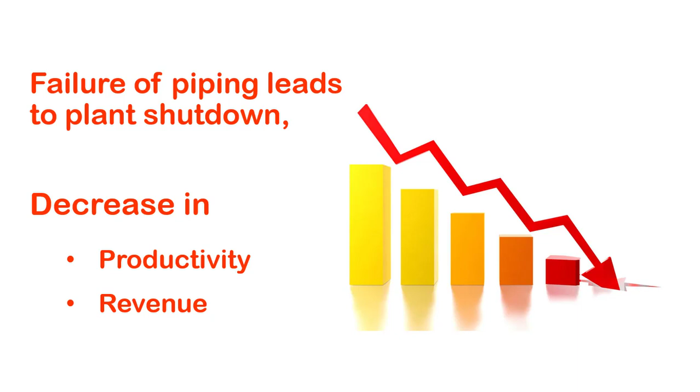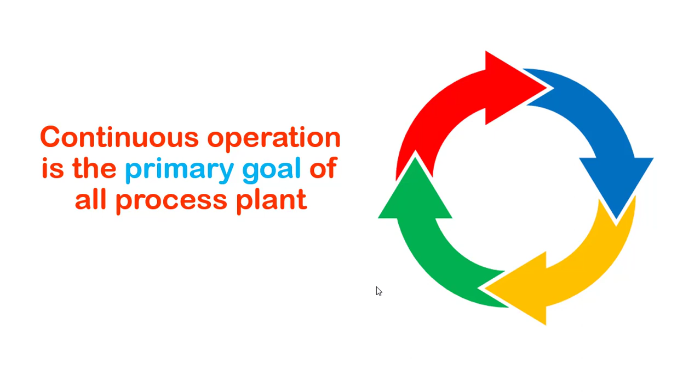Since piping is connected with every equipment in the process industries, a failure in piping could lead to plant shutdown. Plant shutdown decreases the productivity and the revenue of the plant, because continuous operation is the primary goal of all process plants. In case of failure in piping, it will disturb the continuous cyclical process. In turn, it will impact the productivity and the revenue of the plant. So this shall be achieved only by having a reliable piping network. A reliable piping network shall be constructed only by having good engineering principles. That is where piping engineering plays a vital role.

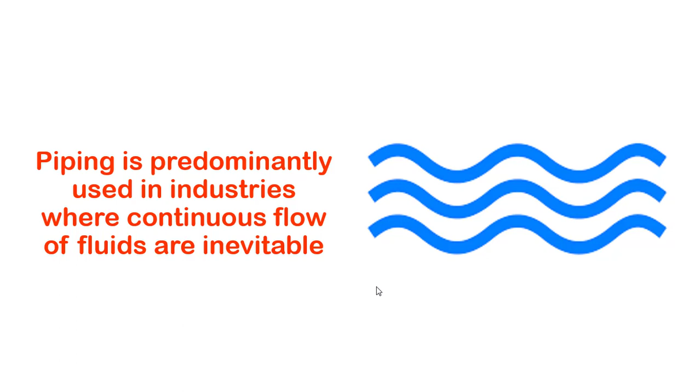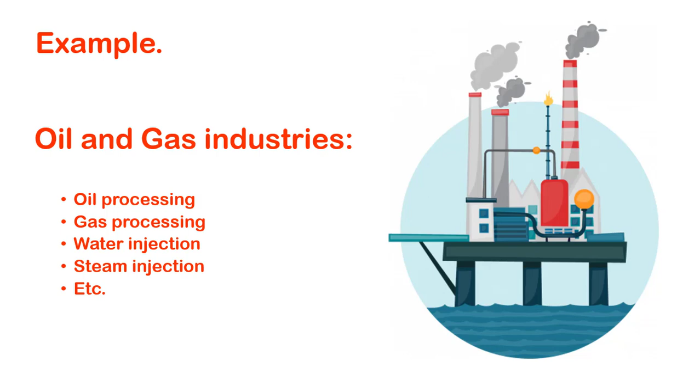We should also understand that piping is predominantly used in industries where the continuous flow of fluids is inevitable. For example, let's take oil and gas industries. In oil and gas industries, oil processing, gas processing, water injection, steam injection, and many other utility services work simultaneously. For this to happen, there must be a reliable piping network and reliable piping system. If there is no reliable piping system, it will not support the entire process and it will end up making huge damage to the infrastructure.

This is one of the reasons why I could see that opportunities are endless in piping, and the reasons are listed over here. The first reason is that all process plant operations are continuous, and for continuous operations, continuous monitoring is mandatory to prevent leaks and damages. Not only monitoring, it also requires continuous improvement to meet the industrial standard year on year. And it also requires modifications and expansions based on the utilization of the plant. So according to me, piping opportunities are going to grow to new heights, as I could see a growing demand for process plant requirements in our country.

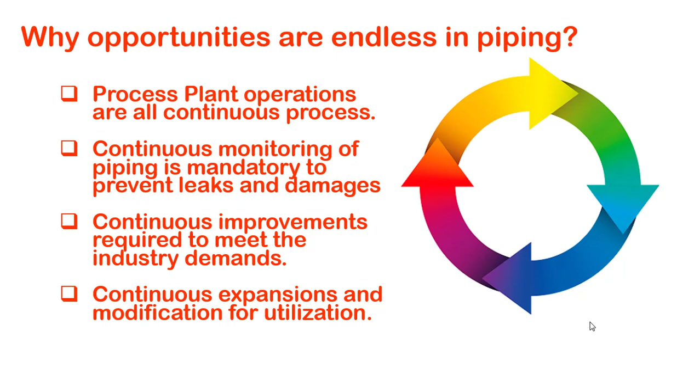Alright, let's get into the subject. I have classified the industries into two types, Class 1 and Class 2. Class 1 is a type of industry which needs more piping infrastructure, and Class 2 is a type of industry which needs less piping infrastructure. So basically, in Class 1 type of industries, you will be able to find more opportunities and more piping jobs. And in Class 2 type of industries, you will be able to find fewer jobs. Compared to Class 1, the magnitude of opportunities may be less in Class 2. So now let's see what are the Class 1 and Class 2 types of industries.

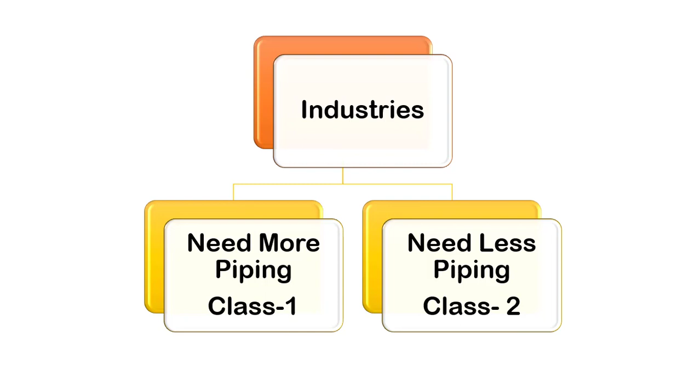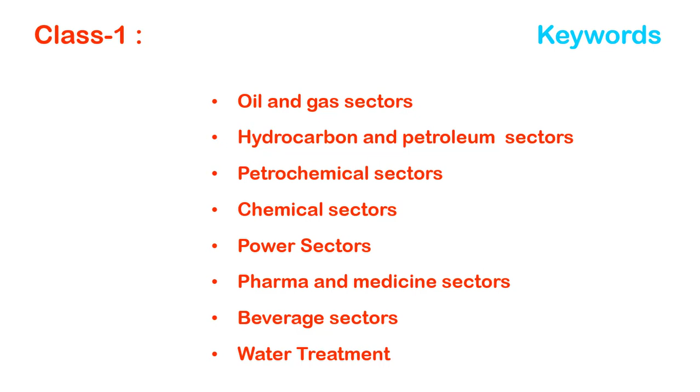In Class 1 type of industries: oil and gas sectors, hydrocarbon and petroleum sectors, petrochemical sectors, chemical sectors, power sectors, pharma and medicine sectors, beverage sectors, and water treatment plants and water treatment industries. These are the sectors and industries that fall under Class 1 type of industries, where you will be able to find a lot more piping opportunities and piping jobs.

Now let's see the Class 2 type of industries. Class 2 type of industries are basically the type of industry where the piping network requirements are less. Basically, the piping infrastructure requirements are less. But still you will be able to find an opportunity for piping, because as I said, the magnitude of the opportunity may be less, but still you will have openings in these industries.

So what are the industries that come in Class 2 type of industries? Basically FMCG sectors. FMCG companies with oil, shampoo, soap, hair beauty, hair conditioners and beauty products manufacturing units all come in Class 2 type of industries. And along with FMCG, fertilizers and cement industries, food processing units, and fire water service providers also come in Class 2 type of industries, because all these types of industries need a little amount of piping to handle utility services.

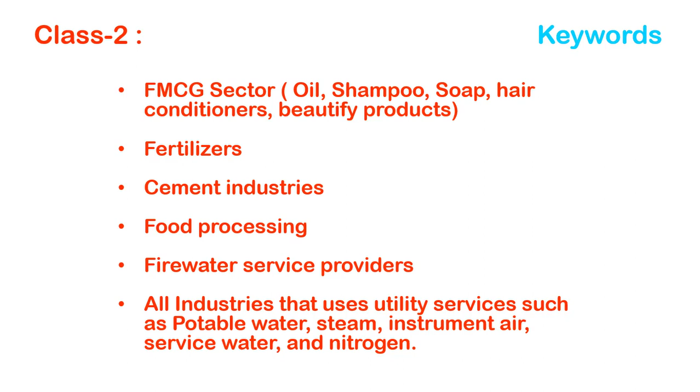So that's one of the reasons why I am saying that in class 2 industries you still have an opportunity to find. But compared to class 1 industries, class 1 has a huge number of opportunities. In class 2, the number of opportunities may be less. Alright, till now we have seen the industries where we can find more opportunities for piping. Now we are going to see the different nature of business where we can find piping opportunities with respect to our skills and qualification.

I have classified the nature of business into two different types. One is operator and the second type is service provider. Let's look into these types in detail. Operators are basically the government bodies who own the company, who own the process plant. These are the process plant units involved in manufacturing of byproducts. Companies like Saudi Aramco, ADNOC and Kuwait Oil Company are known as operators, who run the plant and make the byproduct out of the plant.

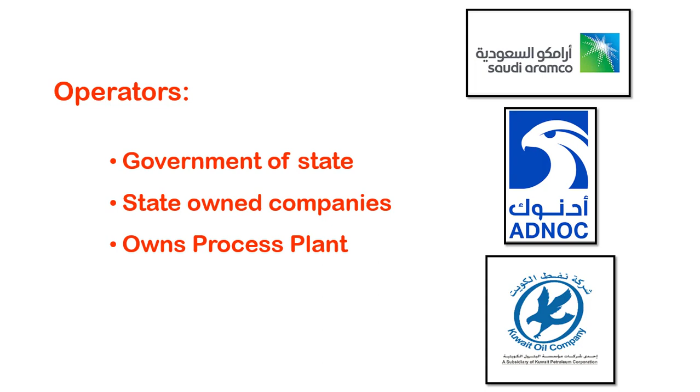These are the different services provided in the industries. A few companies have really improved their expertise in these services, a few provide multiple services together, and a few are focused on one particular service. So let's look into these services in detail. What does a technology supplier do? Technology suppliers sell concepts, in the sense of ideas, and they sell engineering procedures, engineering specifications and material specifications. These are companies you must be well aware of, like Shell, Chevron and ExxonMobil, who supply the complete concept of the plant.